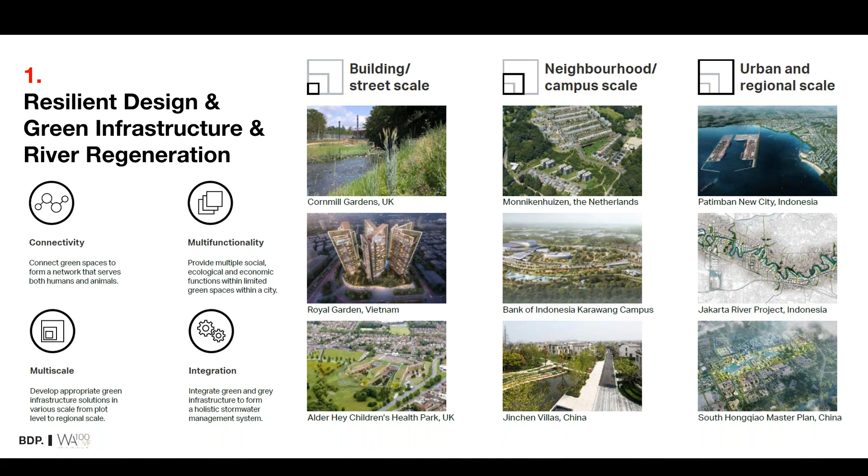Lockdowns have brought into sharp focus the need for more accessible quality public green spaces. So we're seeing a drive by both public and private sector funding into regeneration projects centered around river or waterfront renewal. These projects are often underpinned by new civil infrastructure and green placemaking, with the objective of unlocking land value for future development, while also providing resilient design to address flooding and climate change issues.

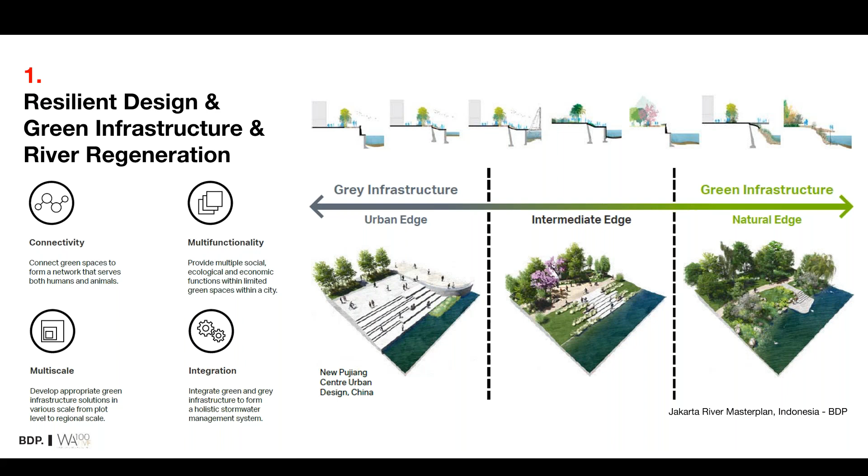From China to South America, there are numerous places where cities still turn their backs to the river, along with the settlements and temporary slums that normally live alongside them. But there is a step change happening, embraced by both public and private sector, and we can see funding from central bank organisations like the World Bank, Asian Development Bank, JICA and others pushing investment into such projects.

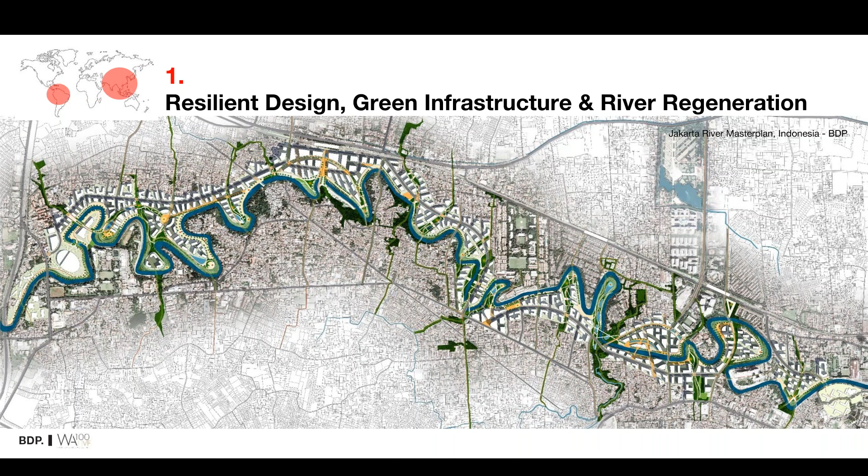On the private side, we've seen river regeneration projects such as this one on screen in Jakarta, led by consortiums of civil engineering contractors seeking to capitalise on potentially lucrative government contracts for flood prevention, water purification, etc., while reciprocally unlocking the adjacent riverside land value for further investment. This is very much a recurring and growing theme.

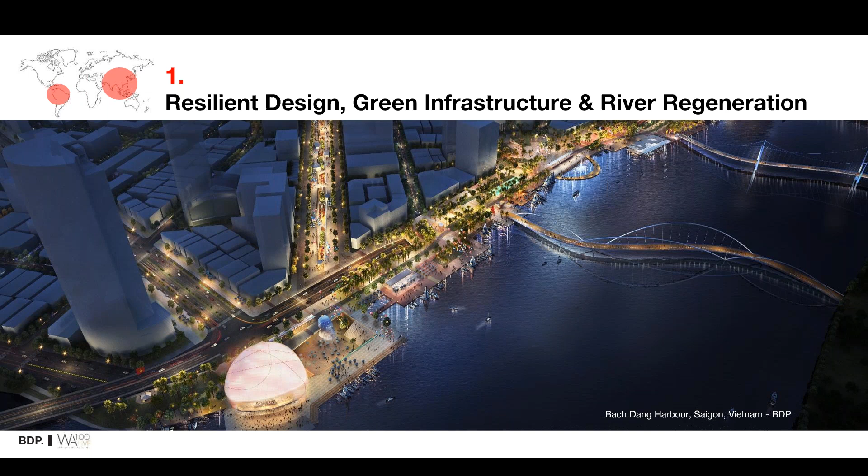Just in Indonesia alone, we know there is a healthy pipeline of multiple infrastructure-led, waterfront urbanisation regeneration projects moving forward, and it's a pattern being repeated in many, many regions as we see it.

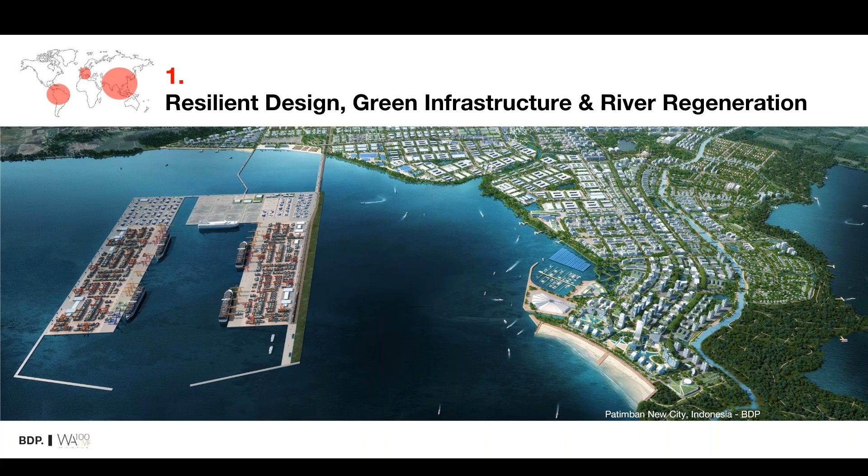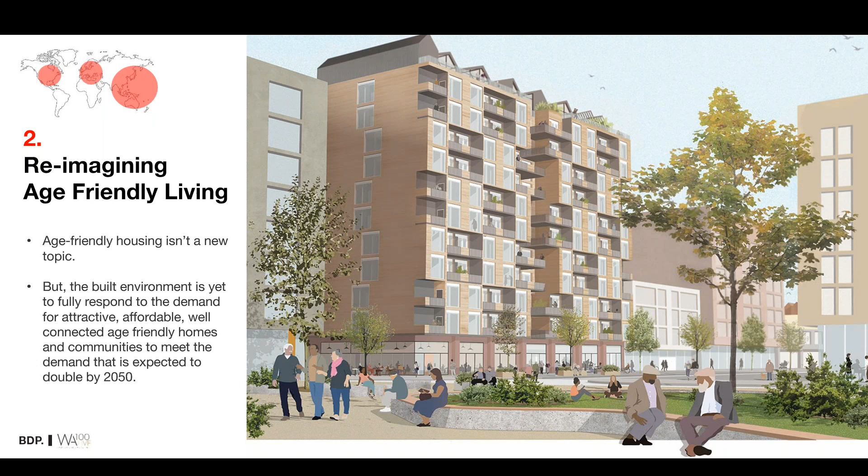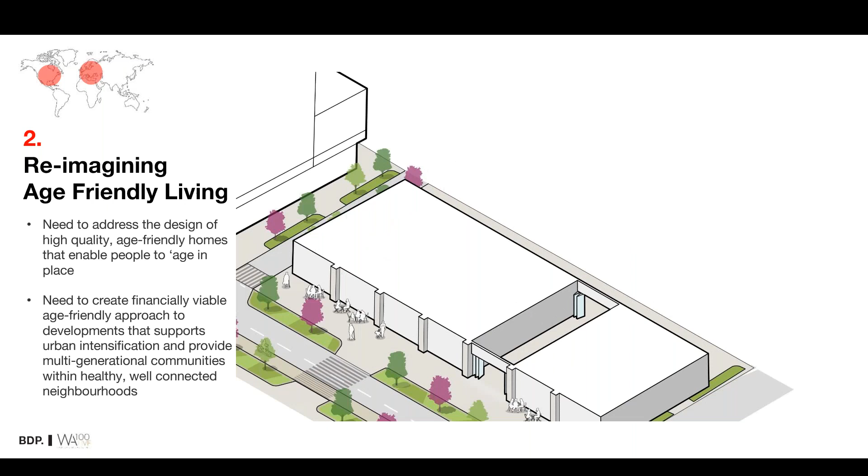The challenges of addressing this vary around the world depending on culture and context. In the West, there are signs that age-friendly living developments have potential to help activate dormant or underutilized sites in high streets or towns, and possibly unlock difficult sites for development by encouraging more diversity and use in town and city centres.

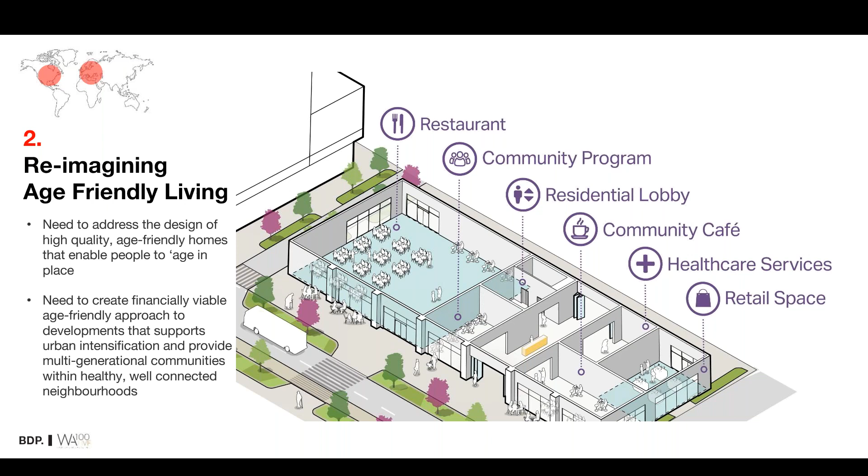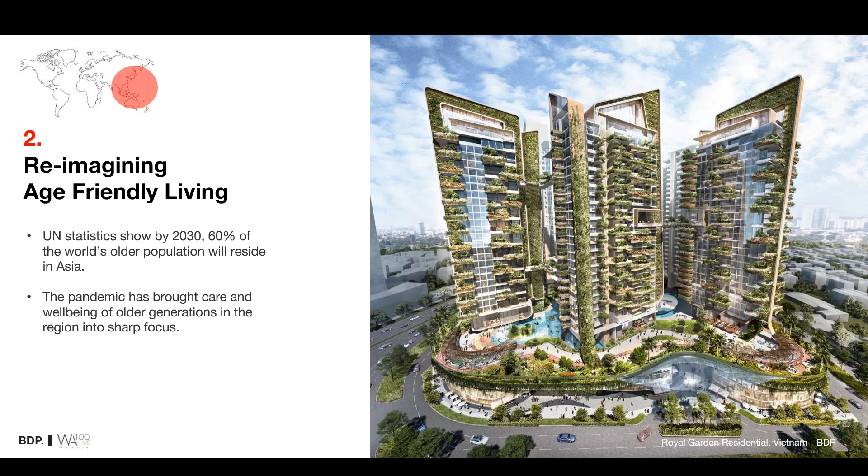In other parts of the world, notably Asia, where the problem is perhaps more acute, there are different challenges to address. Multi-generational living is very much the cultural norm, but the supply of quality, integrated, age-friendly housing in urban centres is very, very limited.

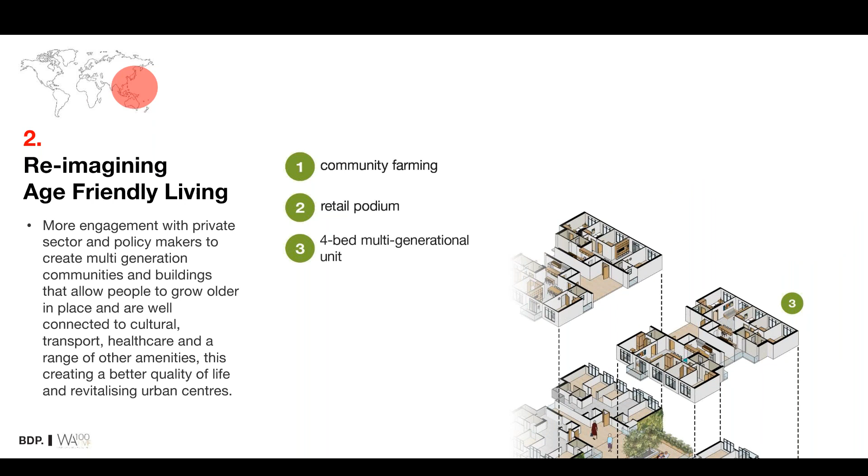We see a number of clients and government authorities at the moment trying to respond to this as we speak, and there is potentially a big opportunity for designers and consultants to formulate solutions that could be applied to a multitude of projects.

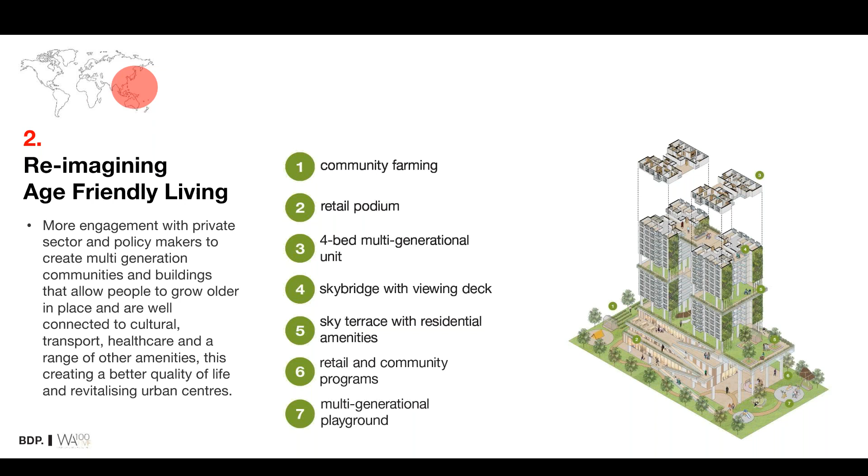Now the third theme, perhaps one that doesn't come as a surprise, is about a reimagining of retail and the notion of a hyper-local community. Even before the pandemic, the way we shopped, spent our leisure time and worked was changing, and like it or not, the pandemic has accelerated this.

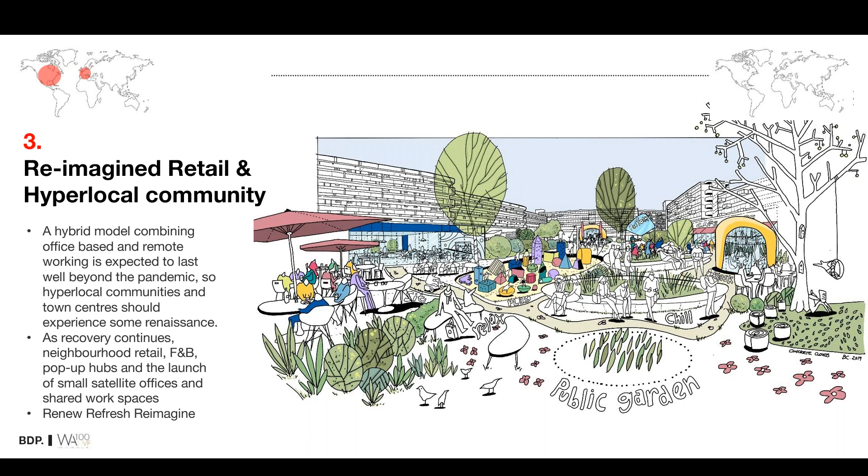Arguably, the retail landscape has undergone perhaps the most painful of transformations in the last couple of years. We know that long-established brands, retailers and retail developers have shut their doors or contracted, and are perhaps rethinking how they operate in response to the new normal.

The question of how retailers maintain a strong connection with and grow their customer base is still to be resolved. But one thing is for sure, they will still need a physical place to create connections and build those brand loyalties. As a huge part of our town and city centres is historically given over to retail space, the opportunity to reimagine them is indeed challenging.

And as a result, we're seeing many clients and developers around the world looking at their retail assets and asking the designers not just to renew and refresh, but to look at how spaces can be transformed into a mixture of retail-led meeting places or experiences that also include homes, workplace, and community function.

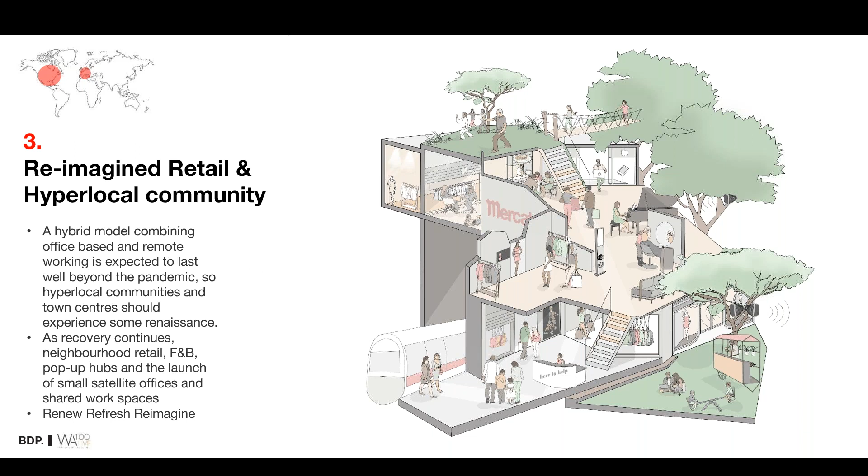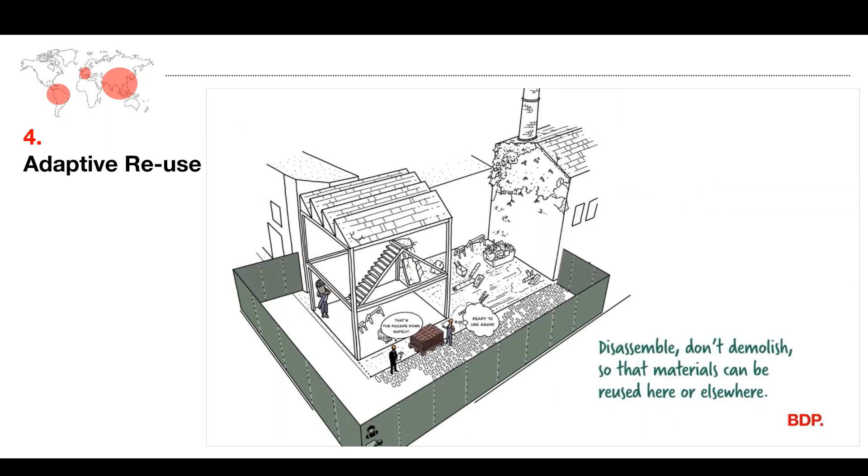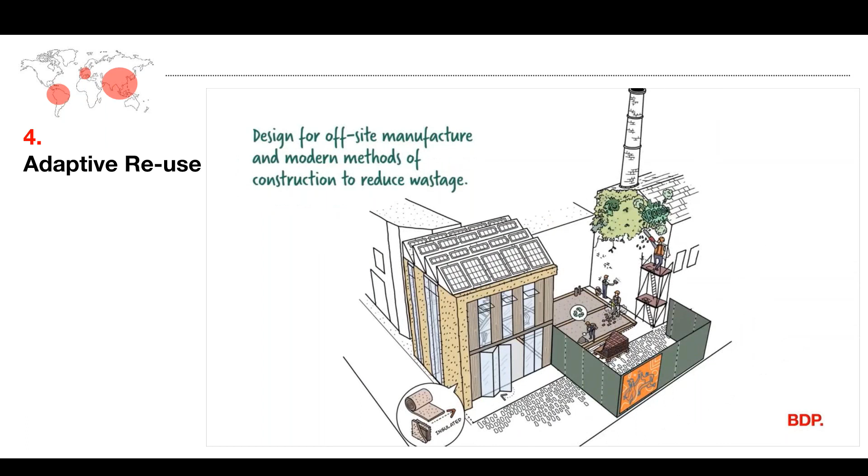And that leads neatly into the fourth theme, which is related: adaptive reuse. Over the last few years, there's been an increase in renovation projects, and that's a trend that's expected to continue well beyond 2022. The advantage of revitalising and refurbishing older buildings is obvious: cost and speed benefits in context of construction and planning, etc., and arguably a far more sustainable commodity in every sense.

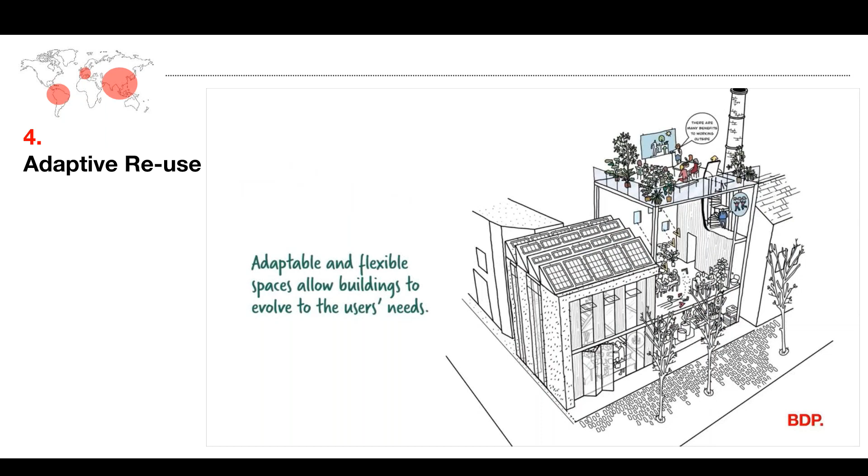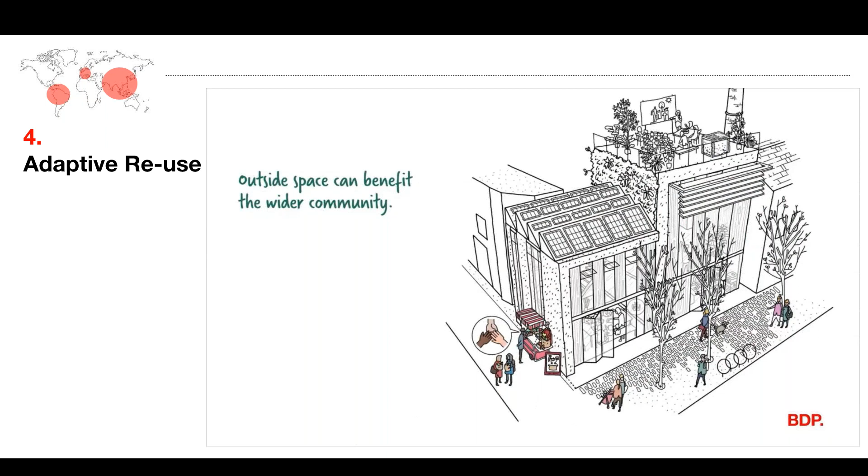But COVID has changed the landscape of the way and the places that we work, so this has put further pressure onto how we adapt and future-proof buildings to give flexibility and create multi-purpose uses. The hypothetical story illustrated in this animation on screen is perhaps more based on a UK, European scale of project.

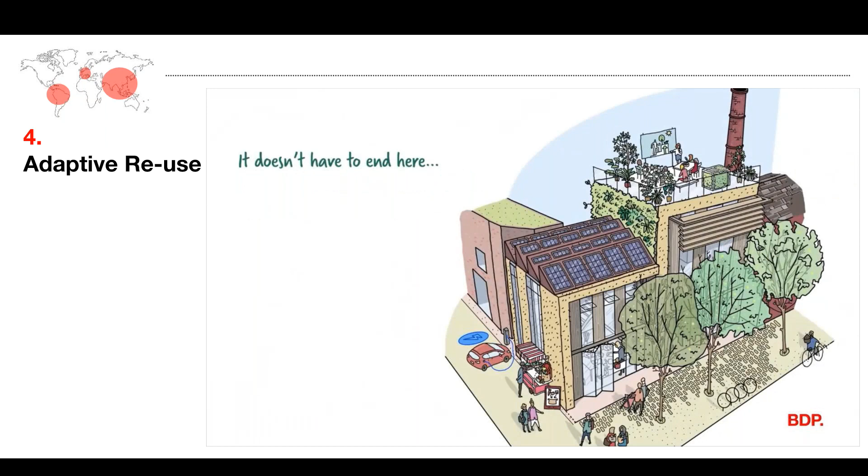But if we look more globally at places like China, for example, and other parts of Asia, where there's been a long attitude of demolish and build from new, there's increasingly a surge in larger and more ambitious repurposing projects. And these more city-scale adaptive reuse projects pose, we think, quite exciting design and technical opportunities for us as designers and architects.

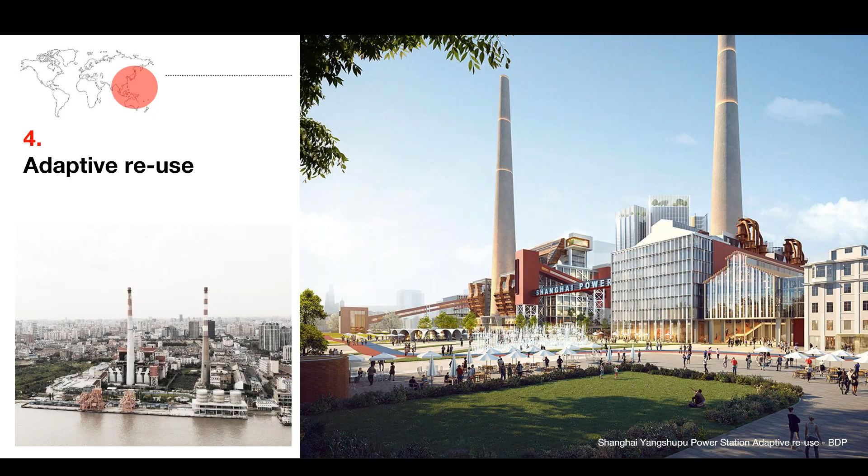But the last theme to mention is mission critical, and we see that expanding exponentially over the coming years ahead. By mission critical, we don't just mean data centers—it can include logistics, production, sci-tech, and other similar functions. But it is very much predominantly led by data and digital hubs.

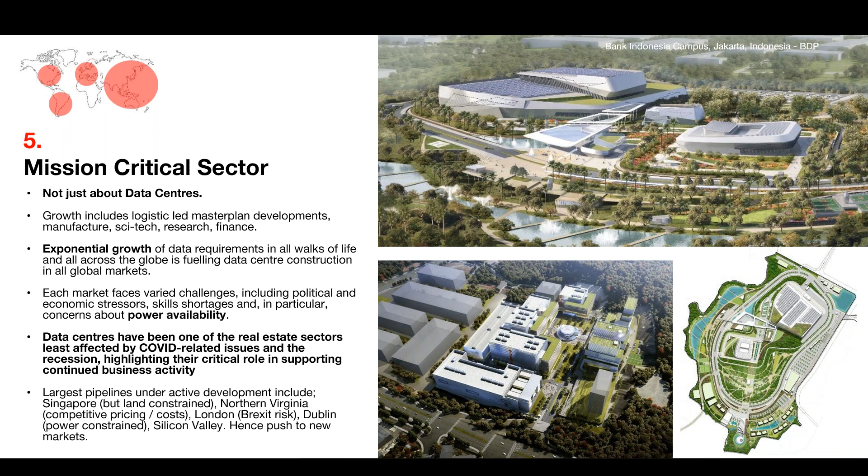And stating the obvious, the exponential growth in data requirements through all aspects of life, particularly during the pandemic, continues to rise, and there is a huge demand for mission critical facilities around the world.

Indeed, in Europe alone, there's a projected $70 billion of investment in the next couple of years going into places like the UK, Netherlands, Ireland, Germany. But in all instances, the challenges are how to design what are historically big box facilities that are energy thirsty, but potentially in innovative ways that can either sit in greenfield sites or in a more urban context.

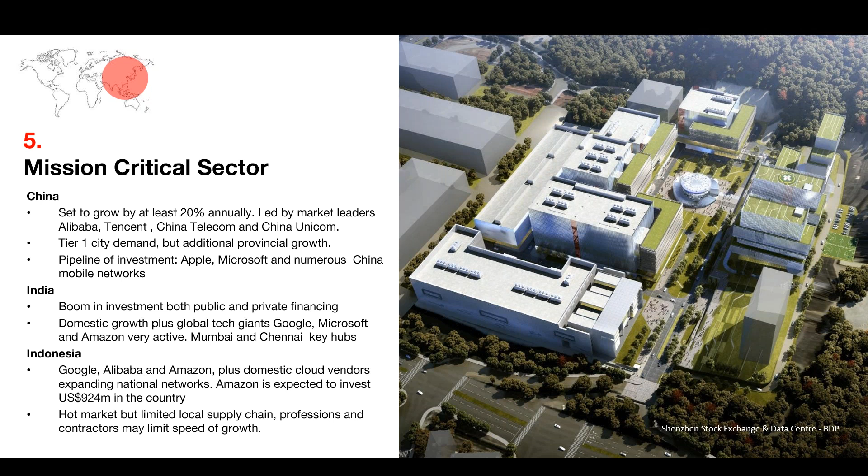And it's very much a similar story in North America, where the challenges are driven by the speed at which data center developers can bring their projects to market. And in Asia, unsurprisingly, the pattern continues, and the industry big hitters of Apple, Google, Microsoft, Huawei, etc., are all pushing expansion in China, India, Indonesia, Vietnam, as well as the more traditional data center hubs of places like here in Singapore.

So that's a kind of whistle-stop of the themes that we see moving forward over the coming year and coming years, I should say.

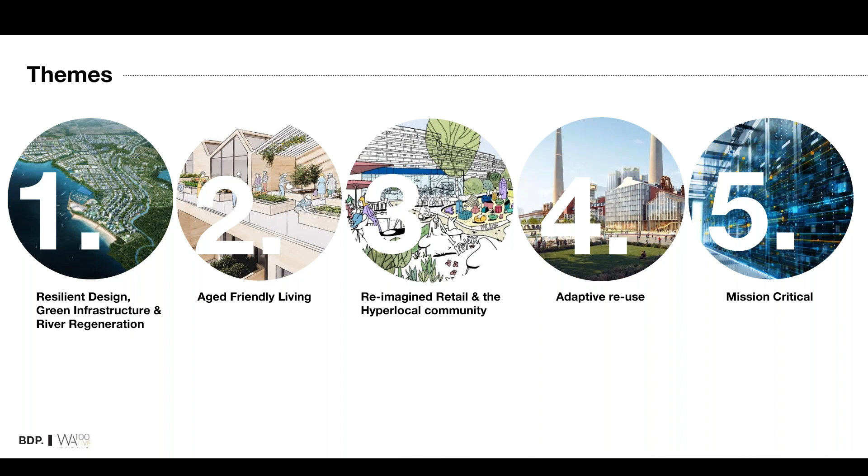I'm just going to bring you back in quickly before we move on to the next panelist. Just on your point—obviously you've got those five themes there—but going back to the first theme around river regeneration, because I know you've written a piece on BD's website today around that. Obviously you've connected that very closely to climate change, but forgive the silly question: if we're talking about developing opportunities around rivers, and we're talking about water levels rising with climate change, how do you make sure that those communities are resilient?

And I think that is the fundamental question, and it has to be driven by the right infrastructure in the first instance. Certainly a lot of the projects we're involved in are being led by government-funded projects that are looking exactly at that—putting in solutions that provide flood prevention, moving back the city edges, looking at other mitigation measures, looking at water purification. So it's actually driven by an infrastructure-funded strategy, and where we come in is how we can try to make that a place and a destination that works successfully for the wider master plan, residential tenants, and the whole community that goes with it.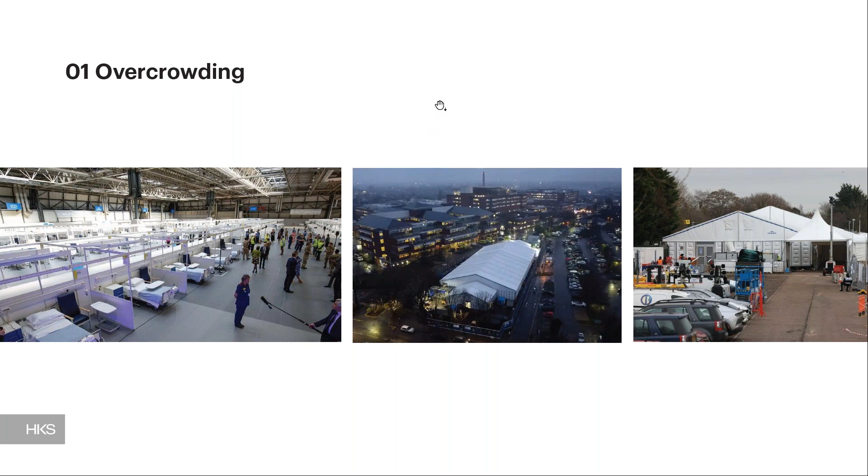Overcrowding - we have been aware of overcrowding in healthcare facilities for years. The flu season has stretched facilities winter after winter, but the pandemic pushed us to first put temporary facilities in conference centres, and then just this winter to put tents up in hospital car parks as backup. The NHS is at the start of the biggest hospital building programme in a generation, and we need to ensure that what we design and build now is ready to cope with the next surge event.

HKS's FleXX Hospital model interrogates how this can be done, crucially whilst maintaining regular operations so that we don't sacrifice elective and non-emergent treatment for surge needs, as we have seen waiting lists grow and grow over the last two years. We're actually currently working on applying these concepts to two facilities, one in the US and one in Southeast Asia.

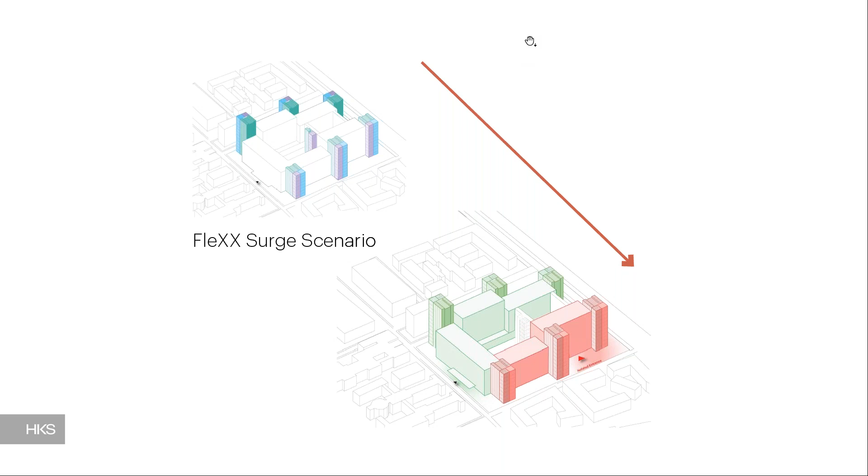Staff shortages have also been highlighted. Before the pandemic, the World Health Organization predicted a global shortage of around 18 million health workers by 2030. Whilst the pandemic has brought record applications to vocations such as nursing, it has also driven many from the workforce. While low and middle income countries will be most severely affected, nowhere will go untouched.

HKS's London Healthcare Advisory Team is looking at how to apply our FleXX framework design thinking to resolve workforce issues through short, medium, and long-term approaches. Building design today can contribute to this by accommodating AI and robotics, which can support the scaling of the workforce without the need for more people. A paper laying this approach out in detail is in the works, so watch this space.

Third, racial inequalities have been emphasised during the pandemic, as minority ethnic groups have died disproportionately from COVID, particularly in the first wave.

The rapid evidence review released by the NHS Race and Health Observatory last week lambasted the NHS for extensive failings in its service of minority ethnic groups. Architecture cannot solve these failings alone, but we can work to ensure that the spaces we design truly serve and welcome all groups in society.

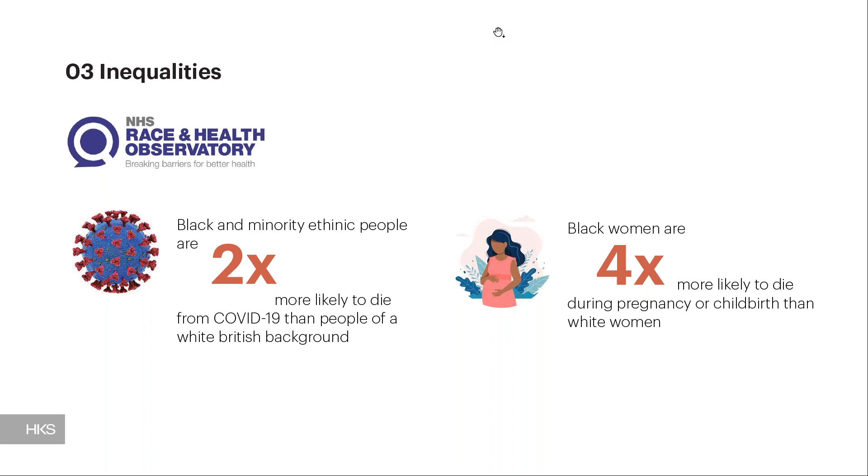Finally, there is the consistent presence of the climate emergency. We need to be designing to meet net zero targets and exceeding them.

Meanwhile, we have also been investigating how to upgrade the significant existing building stock in the NHS. Reusing buildings is a sustainable approach - we have all by now heard the adage, the most sustainable building is the one that isn't built. But in healthcare, reusing existing buildings has particular challenges.

We have recently completed a 200-bed hospital in central London with the Cleveland Clinic, which converted an existing 1950s office building into a state-of-the-art facility. We also completed last year an outpatient clinic for the same client in a 19th century commercial property. Issues regarding structural reinforcement, ventilation requirements, and slab-to-slab heights are just a few of the challenges posed by these buildings.

Within the NHS, the existing buildings were mostly built for healthcare purposes, but our needs and expectations have evolved. Single patient rooms are becoming the norm, technology is ever developing, and room sizes and needs have changed dramatically since the 60s and 70s, when a quarter of the NHS estates were built. And this is all before we consider energy performance.

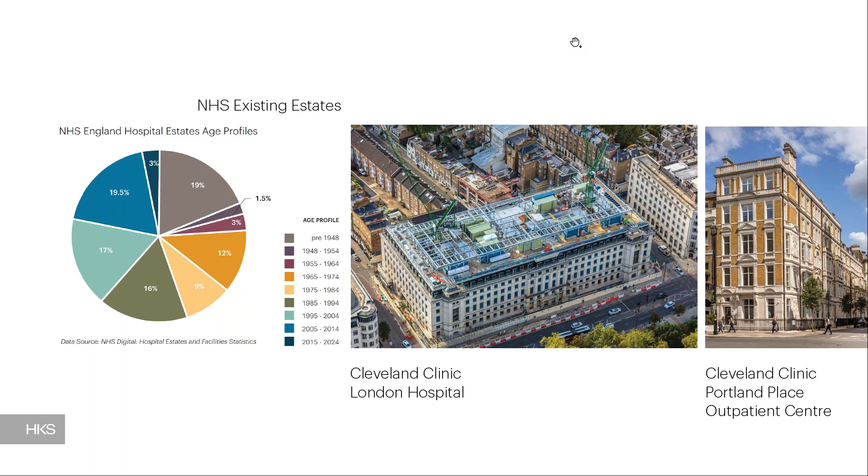In conclusion, the healthcare sector is facing challenges that will not be fixed only by architecture, and certainly not in 2022, but we can contribute.

We can address issues concerning bed provision in surge scenarios by designing for flexibility and scaling from within during emergencies. We can design spaces that make staff feel safe, appreciated, and give them room to rest, as well as designing departments that make staff members' lives easier and incorporating technologies that could augment the workforce.

We can work to knowledgeably provide welcoming, familiar, and accessible spaces for all groups in society. And we can ensure that all of our design choices have their environmental impact at their heart and commit to initiating those conversations with our clients. Thank you.

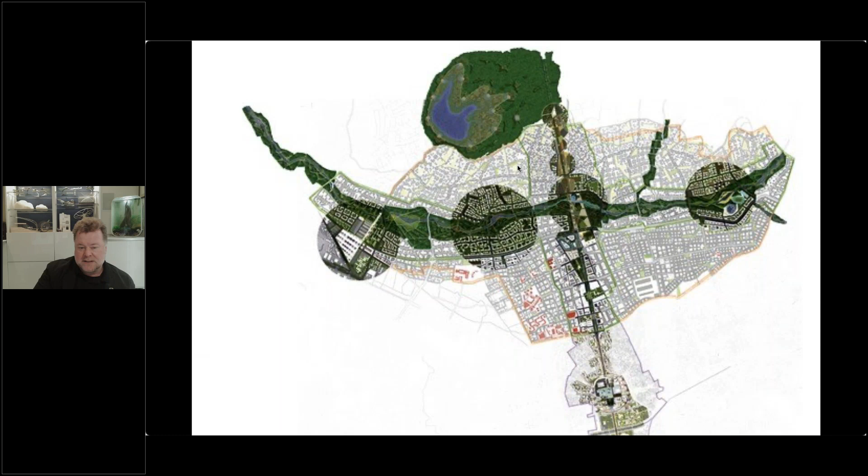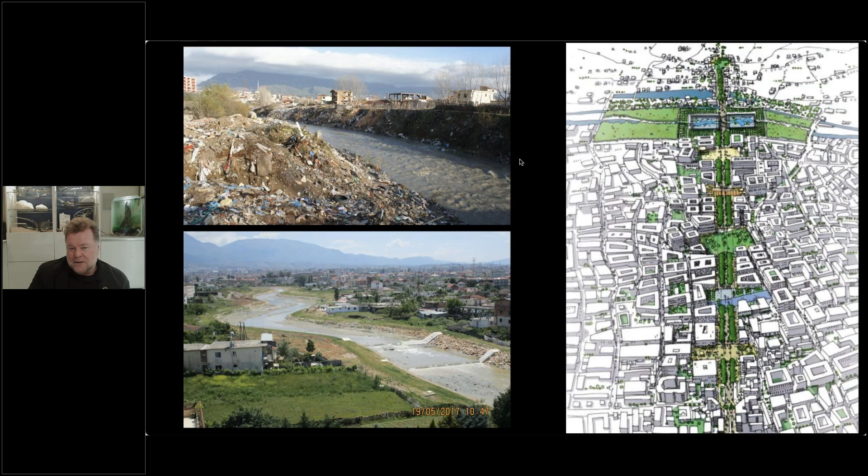It used its central river more or less as a sewer, and it was basically rubbish and a complete disaster. So what we wanted to do was turn it into the major asset of the city, turn it into this sort of green vein and lung running through the city, and use that as a means of reorganizing the city with a whole series of different events along that river, from outdoor Lidos to different public piazzas and so on. And this is it fairly recently.

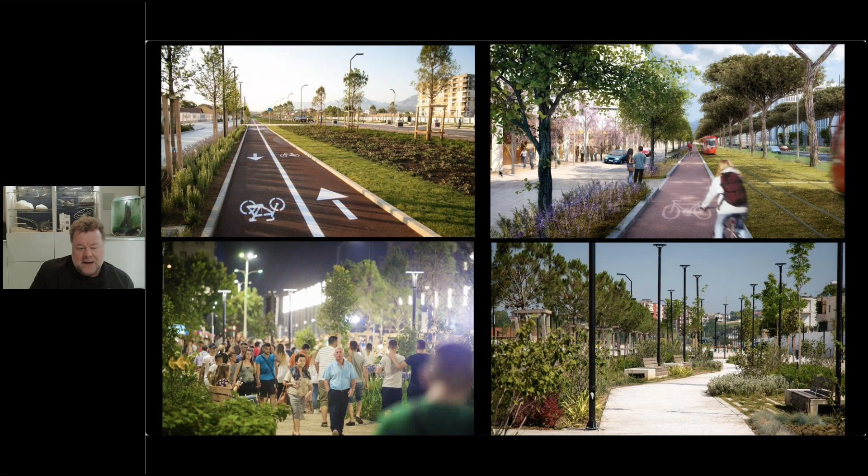What you don't see is there's a whole lot of infrastructure built for future rail and tram systems, but it's completely changed the city. So that polluted city has now come to life as a major asset. I think as architects, we can really bring a lot of creative thinking that can actually transform spaces, but also think about the ecology and environment of those spaces.

And if you want to see growth, a lot of our work currently in the Middle East is to do with master planning, large-scale city developments, and so on. It's probably one of the most forward-looking regions as far as sustainability goes, which for those who don't work there, I think they're quite surprised.

And I think what's happening now is that the whole region has woken up to the importance of sustainability in quite an interesting way. So they're now overlaying a whole set of sustainable criteria, public realm criteria. They've adopted the UN Sustainable Development Goals as part of a framework for future development and laid out their own very sustainable vision, the 2040 Dubai vision.

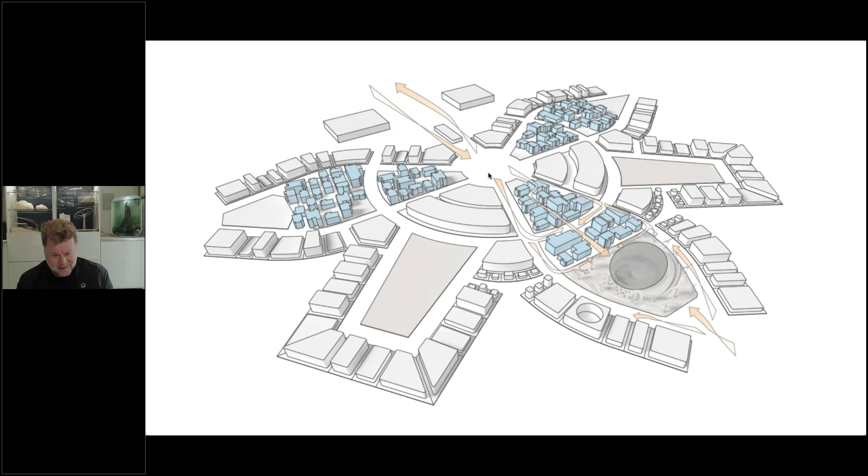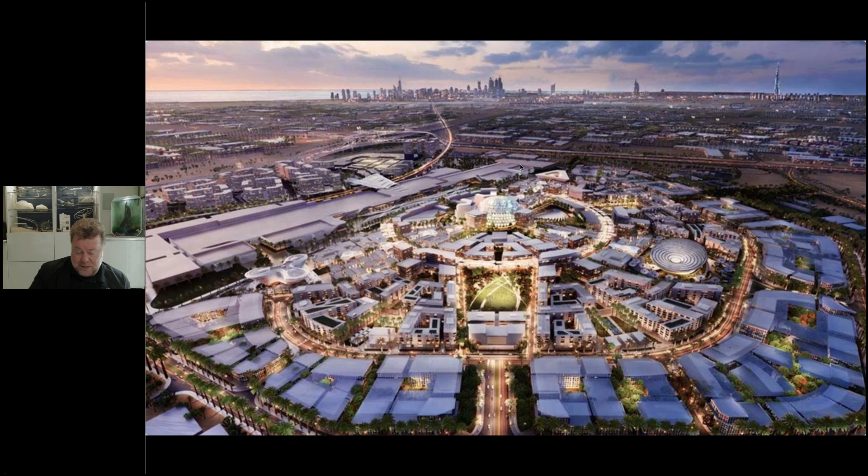We just completed the Sustainability Pavilion Terra, part of the World Expo there. If you've still got a month to go, I would recommend going, because there's 190 countries, so there's an awful lot to see. We did a completely net zero building. It generates all of its own water, its power, deals with all of its own waste, to demonstrate that in the world's harshest environment you can do net zero. And it's a permanent build that they've designed as a permanent extension to Dubai, so it will be an innovative city. Then in India, we've just finished a highly sustainable and green new airport outside Delhi.

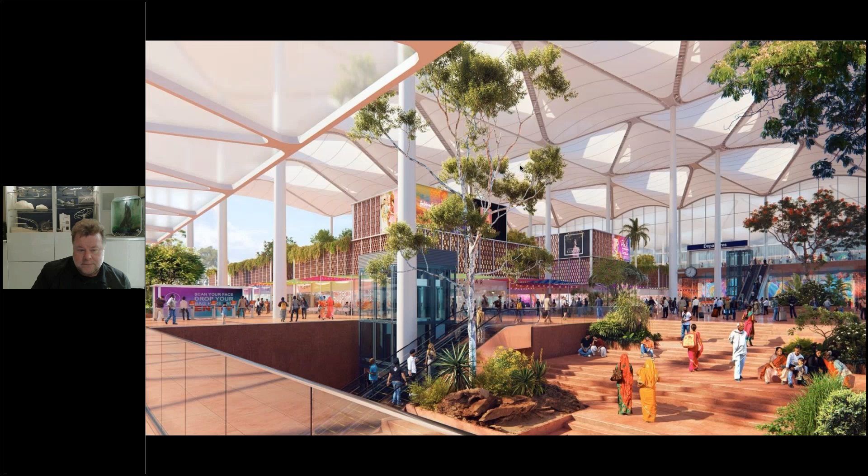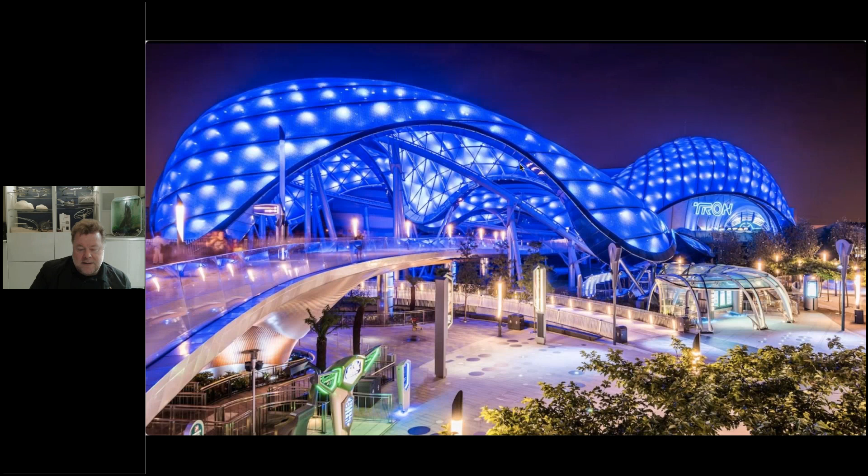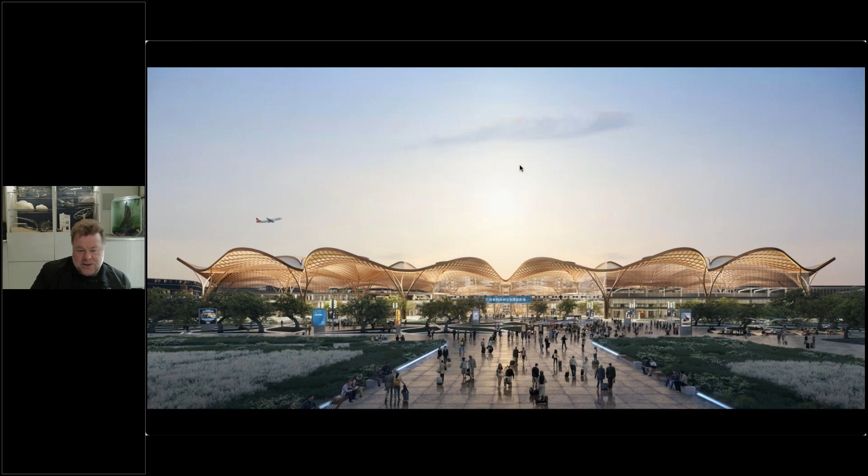China, again, is a very interesting region. Our first build project there was actually for Disney, for Tomorrowland, and the speed of construction is breathtaking - they created all of that in 3 years. We're now just embarking on the Shenzhen East interchange system, and I think we saw a project earlier on for a data center in Shenzhen. It's a massive growing area with an enormous amount of potential.

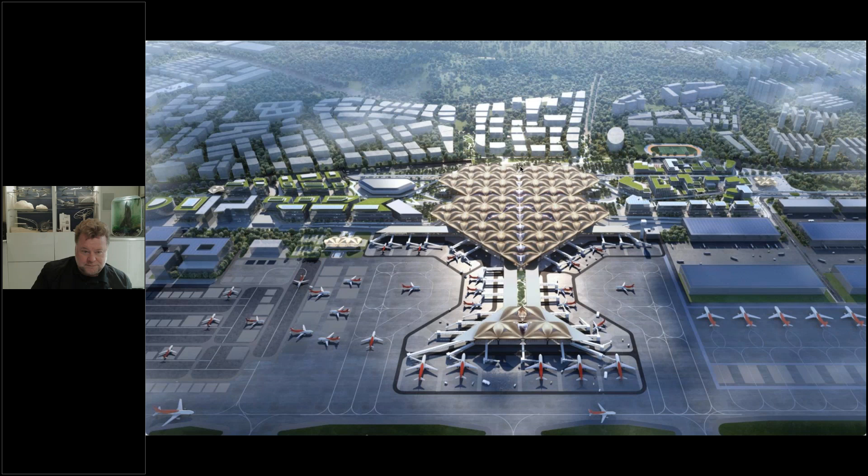So that gives you a kind of quick overview of what I think are the key issues in my mind that we've all got to address, thinking about this massive growth, but also the incredible opportunity and the creative thinking that we can bring.

Thanks so much, Andrew. That's really interesting, and great to see your pictures of completed projects there at the end, just to give us a flavour around the world where you've been active and obviously very successful.

I'm just going to pick up on one small phrase that you said, which is that we try to work with like-minded clients. Easier said than done, isn't it, for architects? How do you find that?

Yeah, I think it's a very good point, because my fellow partners brought it up. When we set these goals of trying to have all of our work being net zero, well what happens if we have a client coming along with a very interesting project but they don't have any interest in sustainability? But I think what we've found is if you talk to any client that has goals and ambitions, as soon as you talk about the opportunity for sustainability and designing net zero, they're extremely interested and want to engage. And I think because we've set these ambitions, it's also bringing to us clients with similar ambitions.

We do a lot of work, for instance, in the US with Google, who have exactly the same kind of vision. Likewise, we're working on a couple of major science and technology projects in the Middle East, and they're both totally regenerative in design ambition, dealing with power, wastewater, etc. So I think the opportunity is growing, and in a way, if you don't share that vision, you're rapidly becoming a dinosaur as a business, because your shareholders will be demanding it as well.

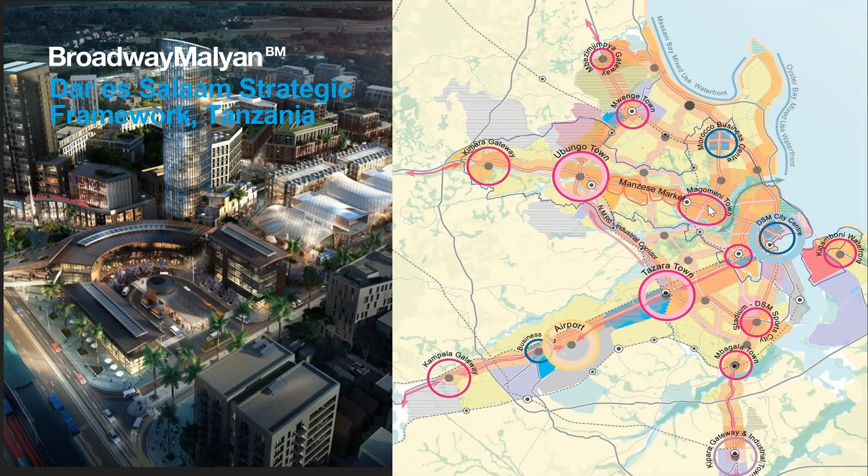But the key thing I believe is to focus on how we blend digital tools and automated practices with that human-centric process. To give you some examples of projects we're working on where we're looking to do this: we've just completed a large master plan for the World Bank in Dar es Salaam, Tanzania, which is predominantly a transport-oriented project.

This is looking at a new rapid transit system, which, because of the economic and infrastructural constraints in Tanzania, will be a BRT, predominantly a bus-driven system. That's looking at reducing commuting times into the center of the city, a typical commute down from 3 hours to 45 minutes over the next 10 years, along a 137-kilometer network.

Our process here was very much to start with traditional consultation, stakeholder consultation, community consultation in groups, but overlaying that with new methods of doing so - social media, data capture, etc. And then working out how we can make places that the community want, that provide the necessary infrastructure needs within an incredibly tight series of funding constraints and budget over the next 10 years.

We're part of the Global Future Cities Programme, a UK government-led initiative, and we're working on 4 rapidly developing cities in Asia. One of those is Bangkok, where again we're looking at transport system connectivity, the BTS system there, and how that might integrate in future to create, at the moment, what is quite a disparate transport system of bus, rail, river and canal networks - how that can be joined up.